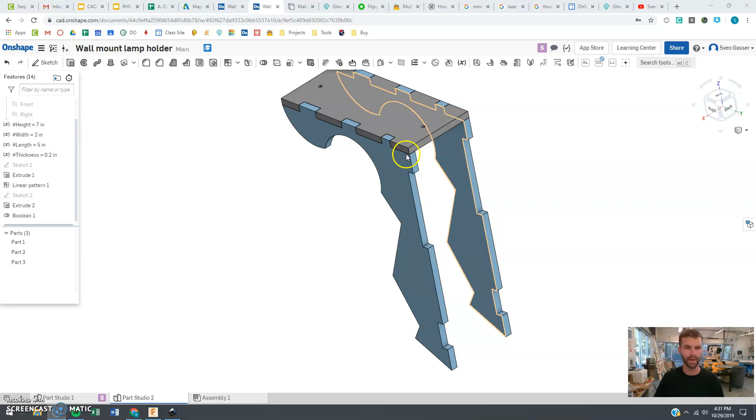All right, so we are looking at the final portion of this project, putting the back on, making that back piece. And we want to make a little piece that has two holes in it so that we can put some screws in the wall, and a little notch there also to give it a little extra reinforcement. So let's jump right in.

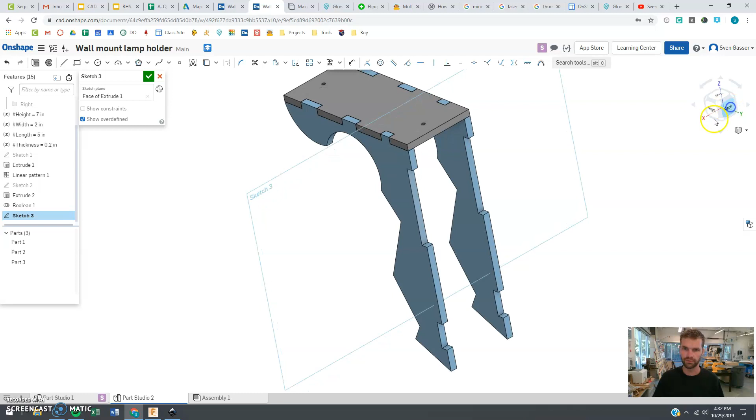We're going to make a new sketch, and just as we did with the top piece, we are going to make it on the lower surface here. And I'm going to view it from there, and I'm going to say use, and I want this corner. Notice I'm choosing the bottom one there. It's going to make our life a little easier later, and that one there. And let's hide all this stuff again so we can just see what we're working with here.

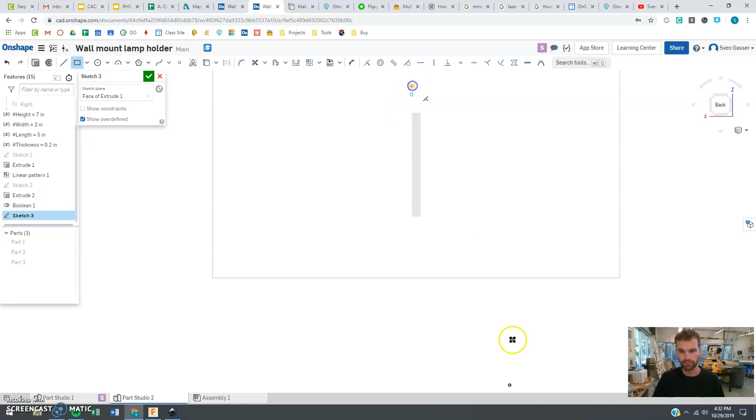And I'm going to make another rectangle just as we did before. And this time, I also want to put a center line down the center here. Just trying something new. And when we do this, we want to turn this into a construction line, a dashed line, by clicking that. Now, that's not an actual part of it, it's just for reference, so we can measure from that and stuff. And let's make a small little hole here near the top. You only need two of these holes. Let's make this 0.125, which is 1/8 of an inch.

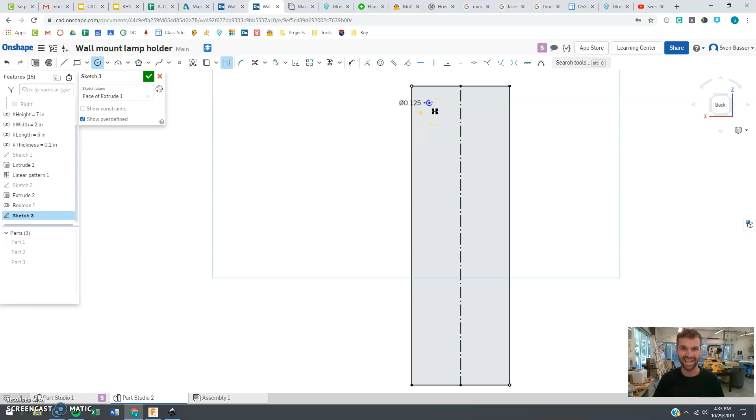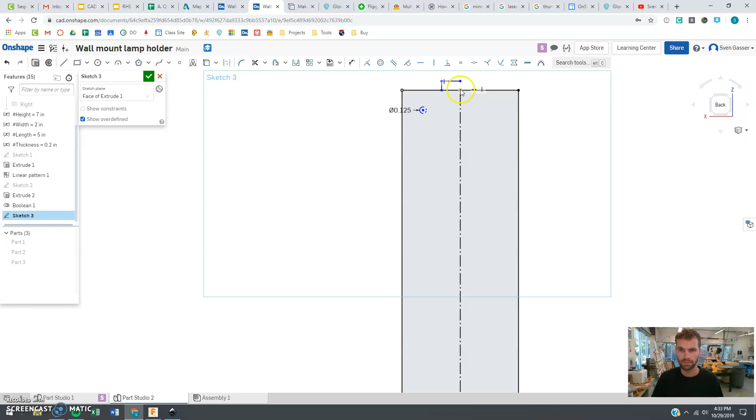And then also we will make our little notch that's going to come off the top here. And that should go right to the center there. Notice I popped that down. I don't need the line there, but that snaps if I go like that, so that it's directly above that. It's in line. All right.

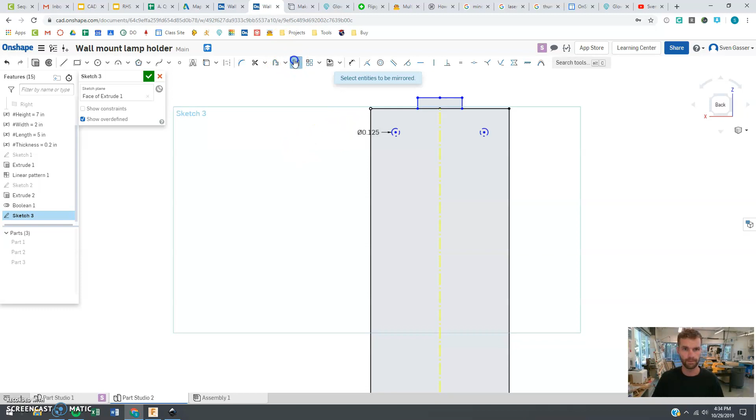And now I am going to use this nice mirror tool. And I'm going to select my mirror line, being that construction line. Now I'm going to select the things I want to be mirrored. And now I've selected all those. I'm going to push Enter or OK there. We'll click that button again. So that mirrored everything. Now I'm going to come through and trim the parts I don't want. I don't want this, and I don't want this.

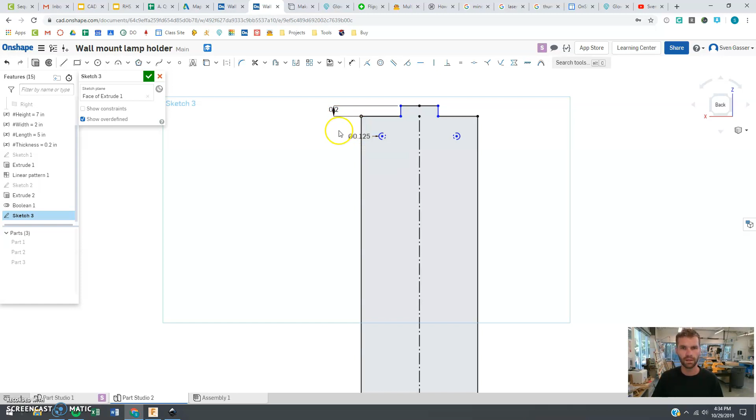These two circles, one thing I didn't do yet is I didn't dimension this. This should be our thickness. And these two circles can kind of be anywhere up there that you're going to have some space. Don't put them too close to the edge, or when we look at our parts again, they're going to overlap there. So give it a little bit of space here. But that's going to allow for some screws, and now I can kind of see what's going on here.

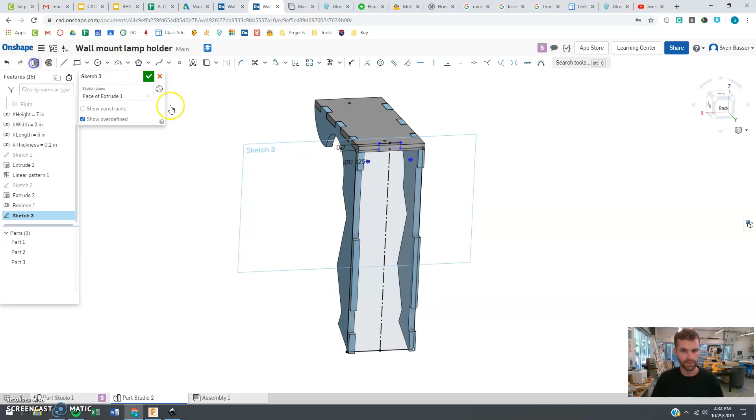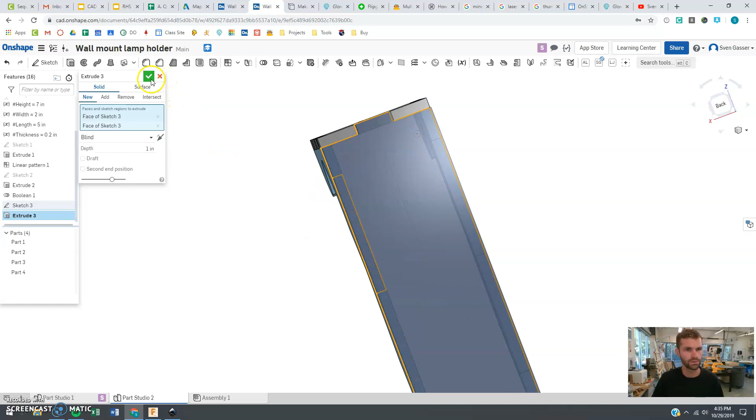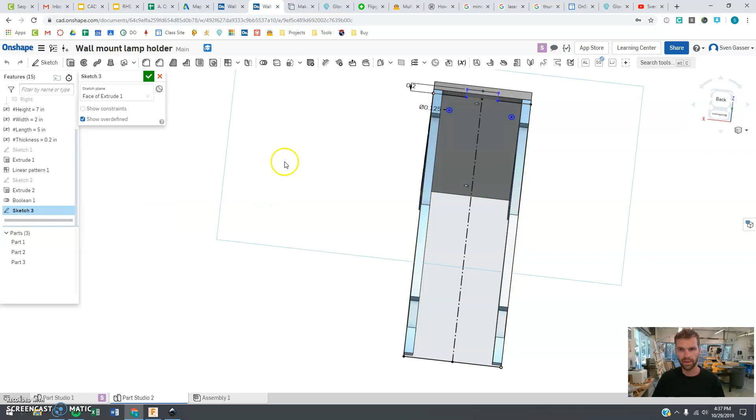I want to extrude this. I'm going to extrude that surface. What's going on there? We'll try that again. Clicking on that, and I also want this piece. It kind of goofs up with that once in a while. That's looking pretty good. Ooh, but you know what? It is not liking those circles. So let's push cancel on that. I think these circles, yep, they are construction lines right now, which I don't want them to be. So let's go back to this sketch, and we are going to have to change those, make those real lines again so they're solid.

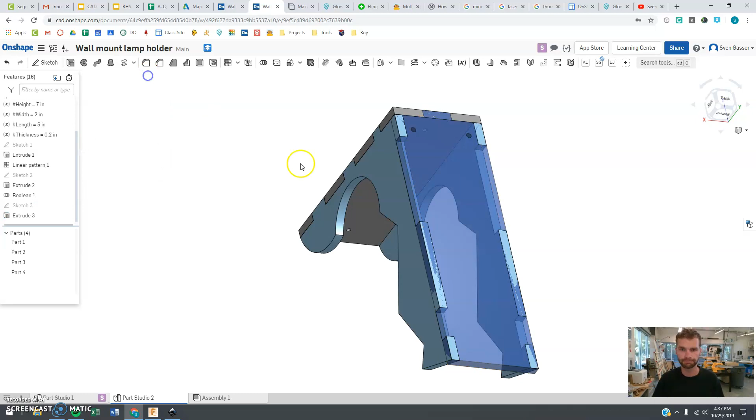All right, now that we have those fixed, we are going to extrude, and we're going to click on that surface, and there it's looking pretty good. I got the holes in there. Changing that thickness to the correct thickness. There it is, making sure it's selected new surface, new part. There we are.

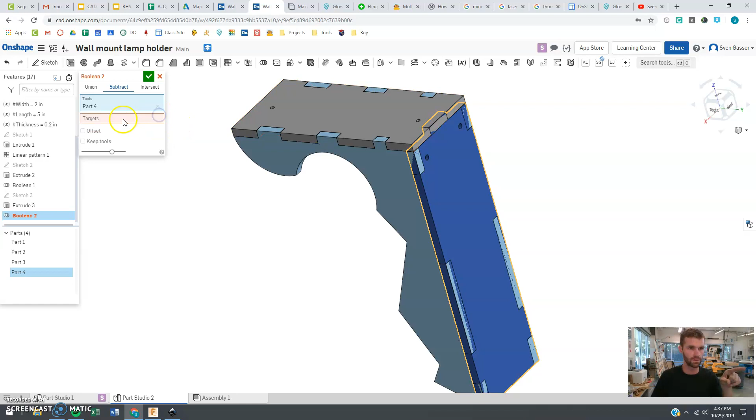All right, now, just as before, we want to do some Boolean operations here, which is this guy. And we're gonna have to do two separate ones because we're trying to cut this top piece for that top notch, and then also cut the blue piece for these notches on the side here. So let's say subtract. First, let's do that top one. So the tool is going to be this back piece, and I want to cut that top piece, and I want to keep the tools, and I'm pushing OK, and boom, you can see that looks better now, right? No gray stuff in there.

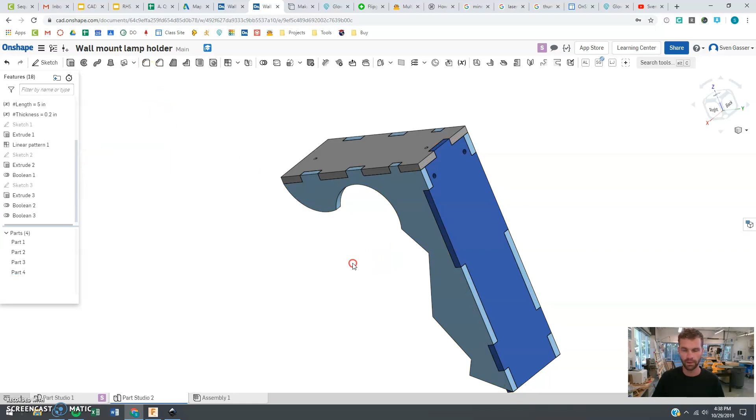And we're going to repeat one more time. This time I want the tools to be these side pieces. And the target, what I'm cutting, should be this back piece. And that's looking pretty good. Now I want to say keep tools though. Bingo bango. We have now created our wall mount piece.

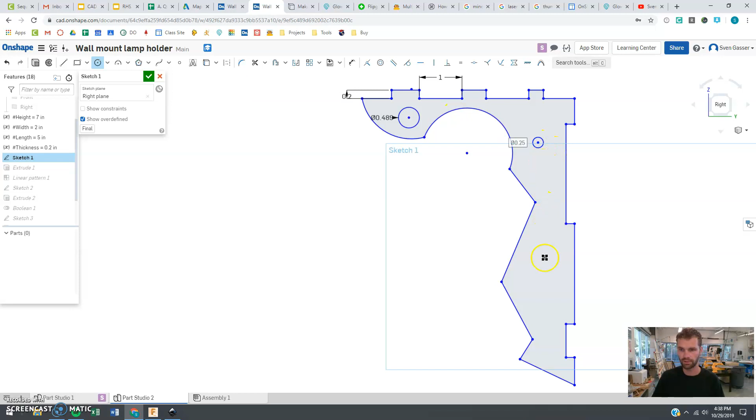You can go back and change things if you want to edit some things, make them look better. Like maybe I want to go add some things to this piece here. I want some holes in there, right? Go have some fun, do whatever you like, make it look good, make it look lit, or whatever you kids say nowadays. Enjoy, have fun. When you're done, you guys know what to do. Export this as a DXF, all your parts.